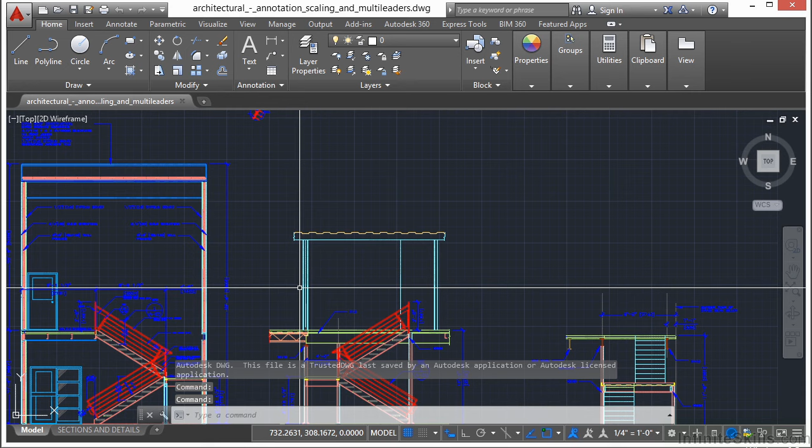Let's open up the Architectural Annotation Scaling and Multileaders drawing file. So if we open up this drawing, we take a look at it, and we go to the Sections and Details Paper Space tab. This drawing is set up to print to a 24-inch by 36-inch size sheet of paper. Well, how do I know that?

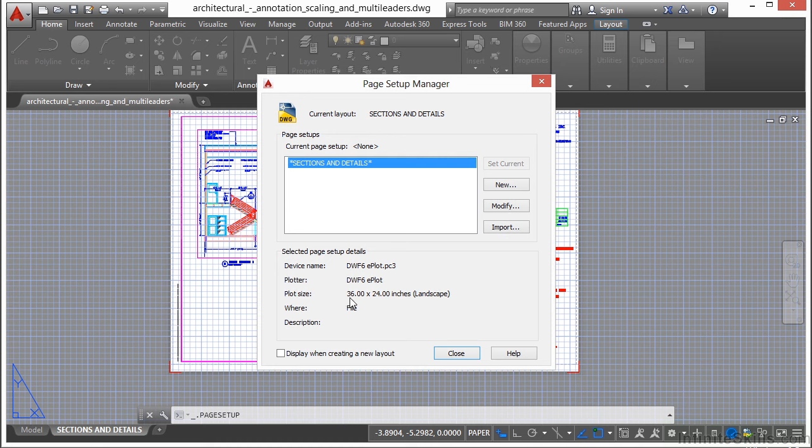Well, if I go to the Paper Space tab, I right-click on it and go to Page Setup Manager. This is where you'll go to set up your printing settings. And it tells me right here, plot size, 36 by 24 inches, landscape mode. Now you can print from anywhere and at any size, meaning that you can print from model space or from paper space. I suggest that you set up your drawing to be printed from paper space.

There are several ways to start the printing process. You can just press Ctrl P, and that will open up your printing settings. You can type in the word plot. You can even type in the word print. In AutoCAD, they mean the same things. You can come up to the Quick Access toolbar, click on the plot button right there.

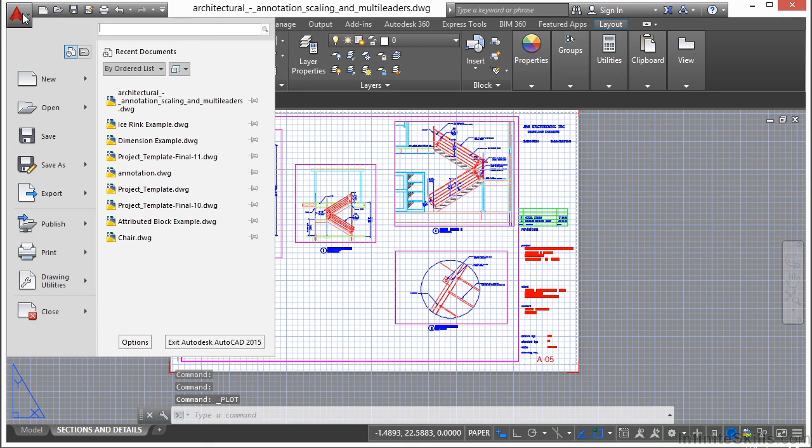Or if you go to the application menu, you can go down to the print button, and you have several different options. If you click on the plot button, again, that brings you to the plot menu. And you can also right-click on the Paper Space tab and click on the plot button. Any of these methods will be fine, and they'll get you to the exact same place.

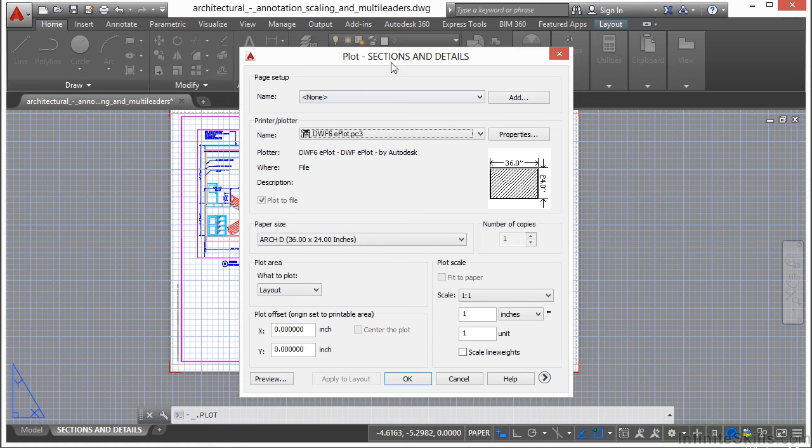Now, as you can see here, there are several different settings. In fact, there are more here than what you see right now. If I click on this little arrow here, it brings up a whole other section of settings that you can get to. You're probably seeing now why it may be so complicated to print.

Page setup is a predetermined set of settings that allow you to print a specific way. All you'll have to do is set it up, and then once you do, you come and you click it, and all of your settings are applied, and you can just click OK. You're going to do that often. In fact, the majority of the time, you're going to be printing from a page setup. It just saves a lot of time.

And exactly where you're going to print to is determined here by the printer or plotter. As you can see, there are several different choices here. Now, AutoCAD comes with several output device settings, like a PDF file or a JPEG or a DWF. We will look at exporting the image files in a different section, so we'll get to that later.

But essentially, to print, you're going to come here, find the printer that you have available, and I happen to have an HP OfficeJet Pro printer here, and it will only print to 8.5 by 11 size sheets. It's a small personal desktop printer. So you pick the printer that you want.

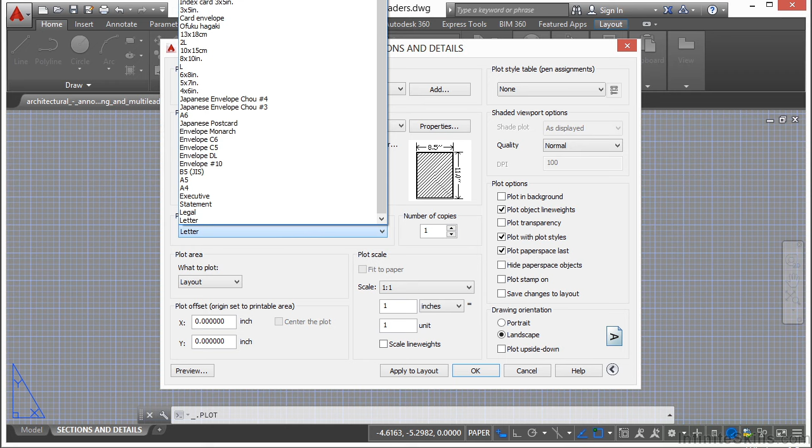You also have to pick the paper size that you're going to print to. So you select down here where it says paper size. Pick that, and I have all sorts of different options for my little printer. I'm going to print to a letter size. And this preview right here gives you an idea of how big your printed page is going to be.

Now, some settings display the page size like 8.5 by 11, or they'll just call it letter, or 11 by 17, or 24 by 36, or 36 by 24, and so on. Now, in most of these cases, the first number will be the width of my paper. I don't have that example here, except for maybe an 8.5 by 13. So the first number shown will be the width of your paper.

So if this was 13 by 8.5, it would be 13 inches wide by 8.5 inches tall. So keep that in mind as well. Now this shaded area here is where my print will end up on the paper. You can change here between portrait and landscape so that it will automatically fit to the page.

A lot of times the height and the width of your sheet is determined by the hardware or your printer itself, and that can't change. So you'll have to change the landscape and portrait orientations here. This little letter is an indicator of how it's going to look on your sheet.

The next setting that you'll have to do is to define the plot area, and that's done right here. Essentially, there are 4 options. Click this little arrow here. You have display, extents, layout, and window. Now there's a 5th option that's not showing up here because this file isn't set that way, and that's printing to view. If I have a saved named view, then I can print to that view as well.

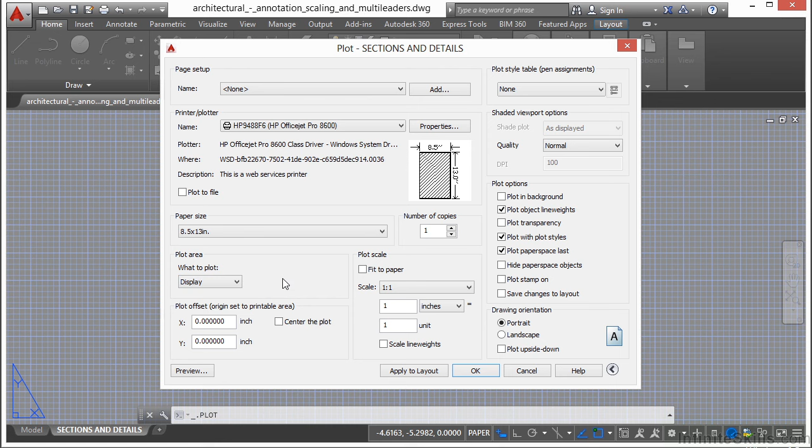Now if I pick display, it will print what we currently see on our screen. So if I can move this window out of the way, what we see here on the screen is what we're going to print. I rarely use this setting, to be quite honest, because it's very difficult to get right. What you see on the screen and how you interpret that to look is oftentimes different from the way AutoCAD interprets it. So just be careful. You can use it, of course.

One setting that I do use often is the extents setting. And you might have noticed that I get a little red line here. That means that when you change your settings and you get a red line on a border, then something isn't fitting in your sheet the way it should be. So that means something won't be able to be printed.

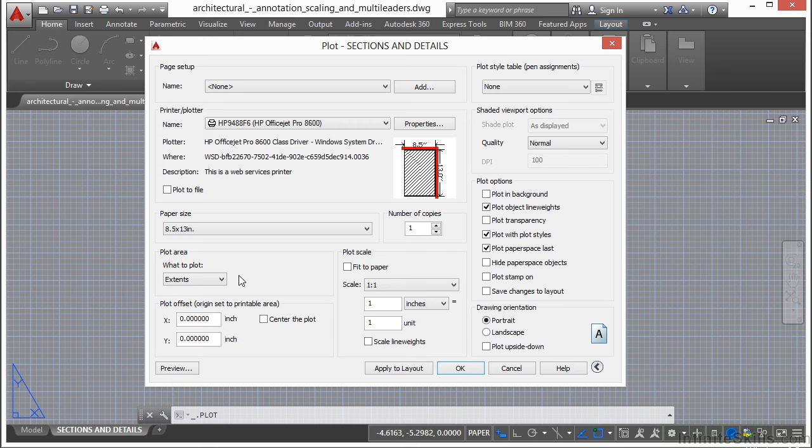It's cutting it off. So when you print to extents, it's just like a zoom extents. It zooms all the way out in that tab, being model space or paper space, and it will zoom out to all of the contents of your page. And then that is what's going to be printed. So it basically prints everything that's in that paper space tab.

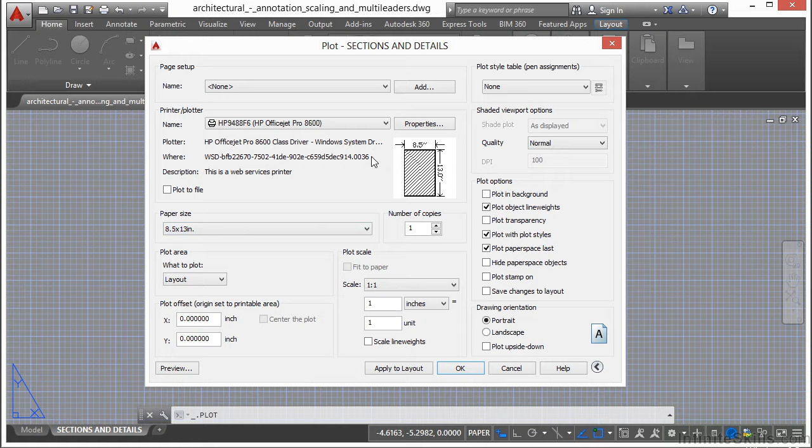Layout will print according to your page setup definition, meaning your paper size and printer settings. So the layout will print to an 8.5 by 13 as you see here. And when you're in AutoCAD and you set up your layout, there'll be a faintly dashed line that shows up around your drawing area.

This is a good setting to use if you have a defined page size or paper size that you're printing to. And it helps you to control the way it's printed on your sheet, because that dashed line is a sort of guideline. So anything inside this dashed rectangle is what's going to print. So you just line up everything that way. This one's used quite often.

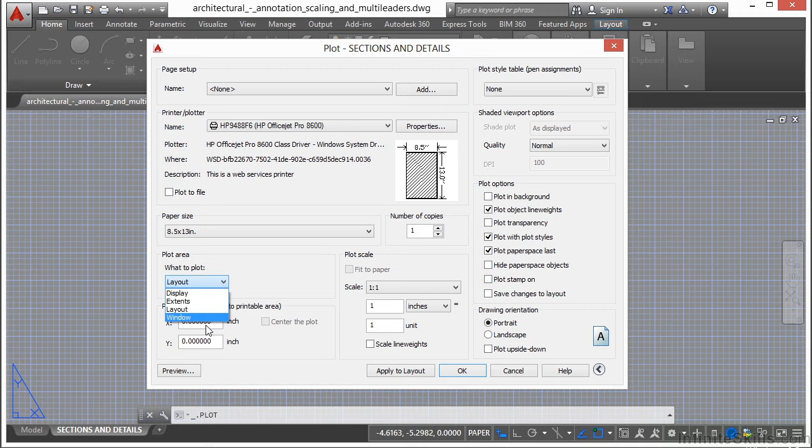And then this last section is a window. Now the window allows you to define a printing area within a window selection. So you can use this to pick your entire sheet if you'd like, or pick on the window again, and you can just select a small area in case you want to print one section or view or something inside, just a little bit of something that you want to print out.

I'll use window a lot when I'm in model space. You can see here my printing area will fit a little bit smaller than the larger one, and it's going to fit inside this 8.5 by 13 inch size sheet of paper. Now to the scale and to the plot offset. Plot offset typically is going to stay at 0, 0 all the time.

The other option you might want to use is center the plot. That means it's going to take whatever it is you chose to print, whether it be a window, layout, extents, display, and it's going to center it on your sheet of paper. This is another setting you're probably going to use quite a bit.

Now the scale. The scale is very important. Typically, you're only going to print 1:1 because you use your scale in your CAD file through your viewports. That controls the scale. And paper space is set up as if you were drawing in paper. So everything is scaled in there automatically by default according to how it's going to look on the paper.

You define your text size, how it's going to look in paper. So if you want your text to be 1/8 of an inch high, then that's what you set your text to be, 1:1. Drawing 1:1 in AutoCAD is the key, and it keeps everything simplified that way. So typically this is going to be 1:1.

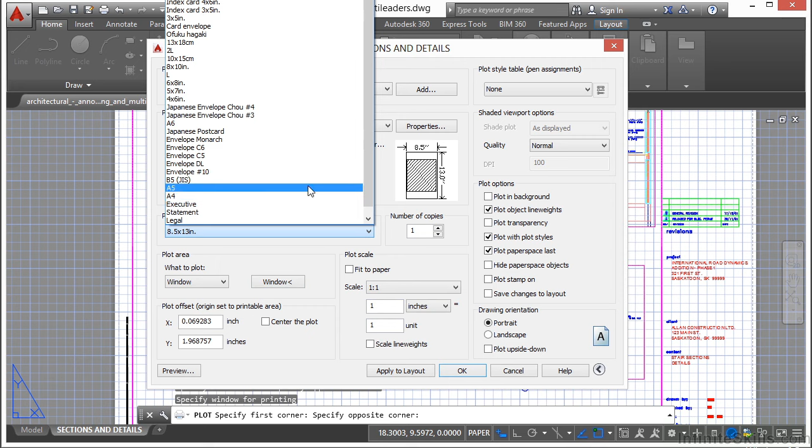Now, in the case here, where I only have an 8.5 by 11 size sheet of paper that I can print to, the letter size, and let's say I want to print the full drawing that I have, extents. It's too big to fit on this size sheet of paper. So I'm going to center it.

And once I center it, you see here I have the red border telling me that this is not going to fit. I'm only going to get the middle part of my drawing. Well, if I click fit to paper, it will scale everything down to fit it on that size sheet. And you can see here the scale has been customized itself.

I can get it to be a little bit better fit if I pick the landscape option right here. It rotates it, adjusts the scale accordingly, and now my full-size sheet is going to be printed down and scaled properly to an 8.5 by 11. Now you see the scale is a little off here, so if I try to put a scale on my drawing once I print it out to make measurements, I'm not going to be able to.

Now there's another setting that you're going to need to take care of, and that's the plot style table or the pen table. That's up here in the top right. Right now mine is set to none. Mine is set to use the line thicknesses as defined by the layers. It's all up to you which one you're going to use. Now if you're in a company, you typically are going to use a file. It's called a CTB file. That's these right here. And you will have set those up according to your company's needs and desires.

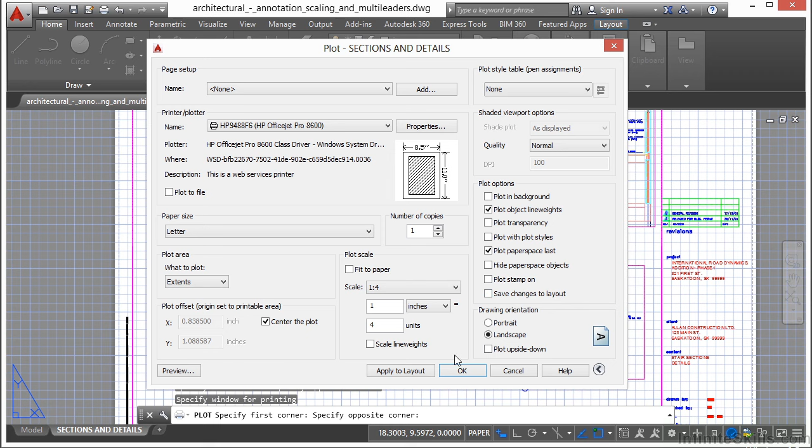You can hide paper space objects, you can turn on a plot stamp, and you can save these changes to the layout whenever you print. I suggest you leave this off, and I do suggest you create a plot stamp. That will help you out quite a bit. And then when you're finished, just click OK, and everything will print out.